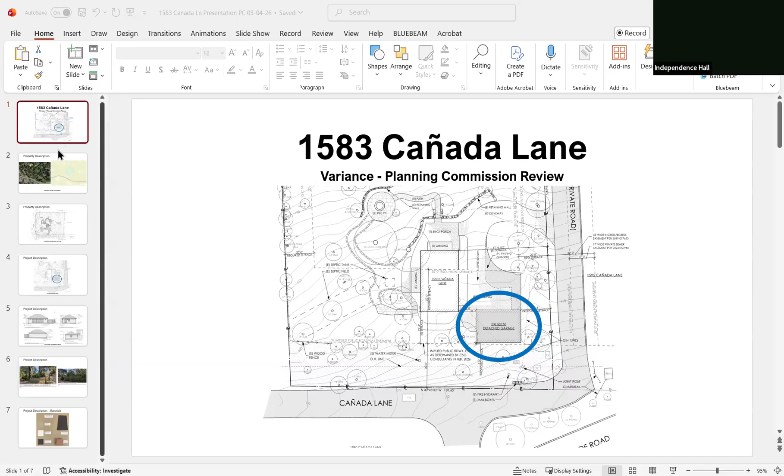To give a quick summary, the property size is 0.88 acres and is in the suburban residential, SR, zoning district, which has basic setbacks of 50 feet from the front property line, 25 feet from the rear, and 20 feet from the sides of the property line.

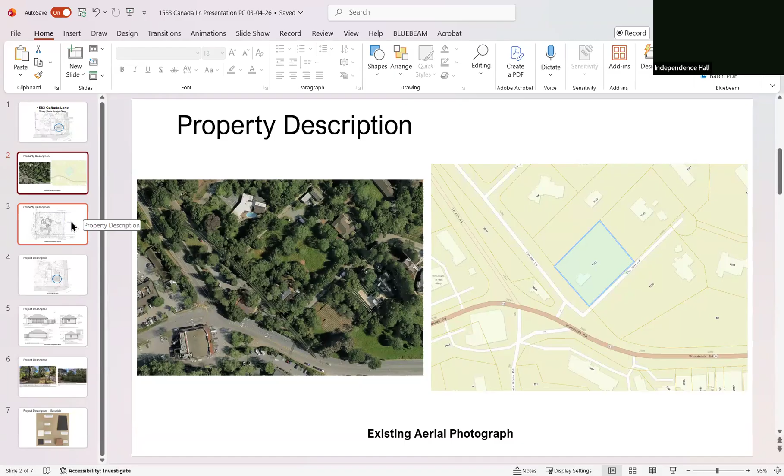The overall site is relatively flat on the southwestern portion, inclining through the center and northeastern portions. The elevation ranges from 148 feet on the southern side to approximately 185 feet on the northern side.

The site contains an existing one-story single-family residence and existing hardscape that are located on the relatively flat southwestern portion of the site. As mentioned in the staff report, the project site includes an easement for a public right-of-way at the southern side.

This determination was made by the town's engineering department, and it is important for determining lot size for allowable thresholds for floor area and paved area, as well as determining the setbacks from the front.

As mentioned, the applicant is requesting approval of a variance to locate the detached garage within the front setback. As explained earlier, the 30-foot half width of Cañada Lane projects into the front side of the project site.

Therefore, the proposed location of the garage would be 1 foot away from the interior boundary of this right-of-way. The proposed location of the garage would require the removal of 3 trees in its vicinity.

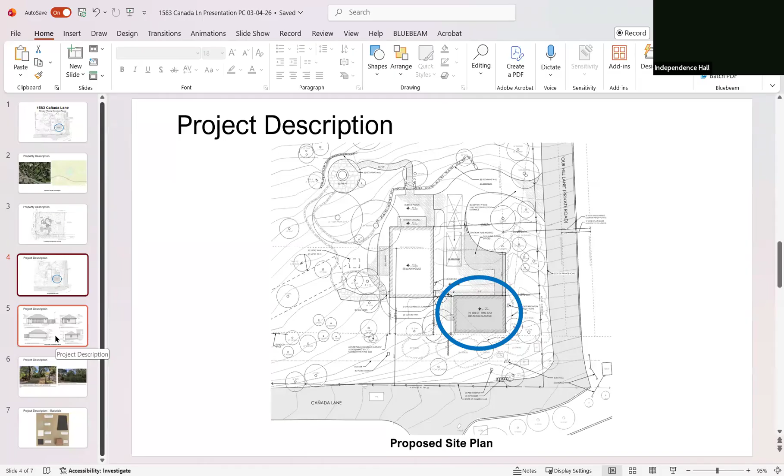The proposed garage would be designed in the same style as the existing main residence. As you can see on the physical materials board on your left-hand side, it shows the materials for the proposed garage.

This includes identical exterior materials such as brick, black asphalt roof finishes, and gray stained wood siding color. Here are the elevations for the proposed garage.

Here are the existing vantage points from the adjacent Cañada Lane and from the private road.

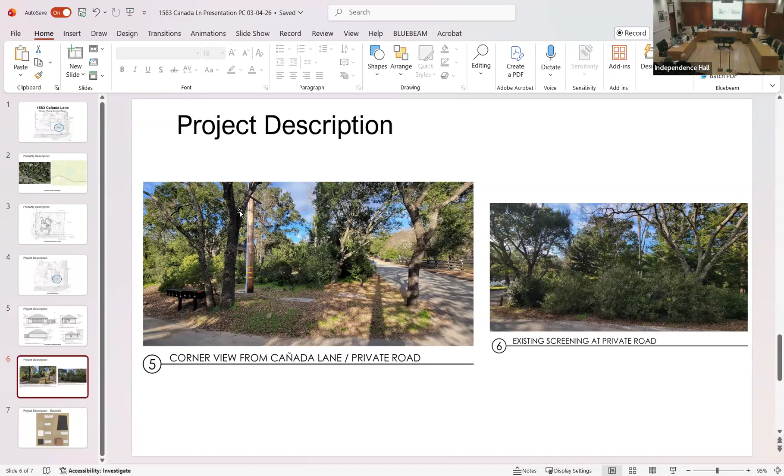Lastly, staff recommends that the Planning Commission adopt the draft resolution in Attachment 1, making the required findings to approve the variance. That concludes my presentation. Staff is happy to answer any questions.

Story poles were installed at least 10 days before the hearing date, and the applicant is also here in attendance to answer any questions. Thank you.

Do any members of the commission have questions for staff?

Yeah, I do. It seems like the nature of this whole thing is based on the 30-foot implied right-of-way from Cañada, from what I can tell. Historically there are records that kind of support it — we think it does exist, but the implied thing was a little bit weird. So my read is essentially we have a 30-foot setback from where the road is, and it's unlikely that would ever get built into the implied right-of-way. So that's kind of how I'm looking at it, but is that the right way to look at it?

How have other cases on this street been looked at in the past?

Our engineering department, along with outside consulting surveyors, reviews all the different documents. Based on what they reviewed, they determined that the easement is there. It wasn't something recorded on the property, but given all the different documentation they have, it is an easement for a road right-of-way.

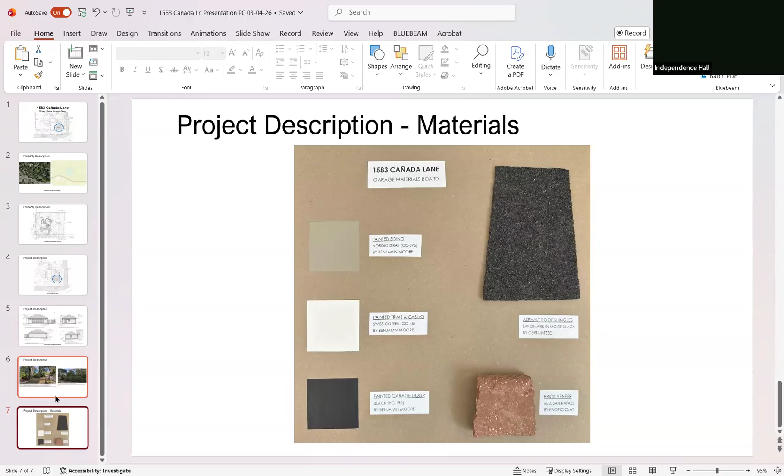You are correct, there are no plans to widen that road now, and there probably wouldn't be plans to widen it anytime in the near future. So for at least several years, unless something drastic changes out there with road widening and sidewalks, it would still have that buffer between the roadway and the proposed garage.

Just a follow up — have there been other projects in this section that we've come across before, and do we have a precedent? It's not completely uncommon.

You get into older lots, cut up pre-1950, and you get a lot of these things coming up from time to time, especially in the Western Hills — questions about right-of-way widths. I don't know if anyone was around when 215 Grandview was heard, but that was a major topic of that project. So it does come up from time to time.

Before there was a subdivision ordinance, lots were created in different fashions, often just by drawing up a deed and getting it recorded at the county, which was a legal way to create a lot back then. Sometimes it's a little bit difficult to find all of those details.

Am I correct that the official lot line actually goes over into the road, or the entry road?

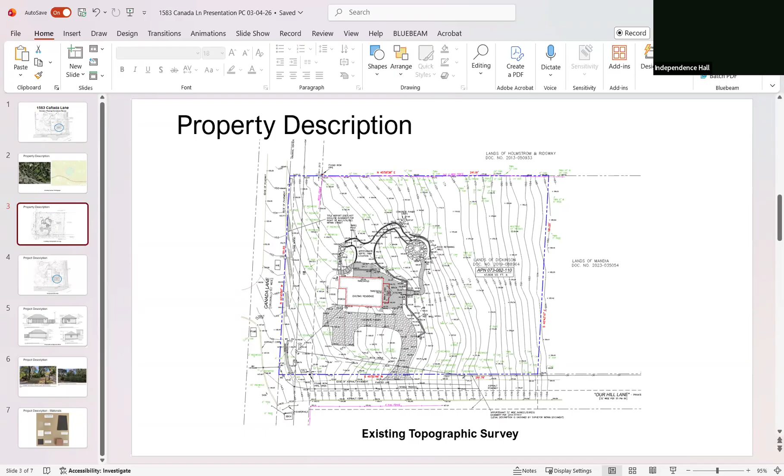Yeah, so what's being shown — if you pull up the site plan — is that you have a 60-foot right of way, usually 30 feet on one side and 30 feet on the other. If you zoom in, the property line that is the outer boundary of the 30-foot easement is just right about where the pavement is.

Okay, so the blue line is the property line? Right, so it leads right into the pavement of the road, just right around here.

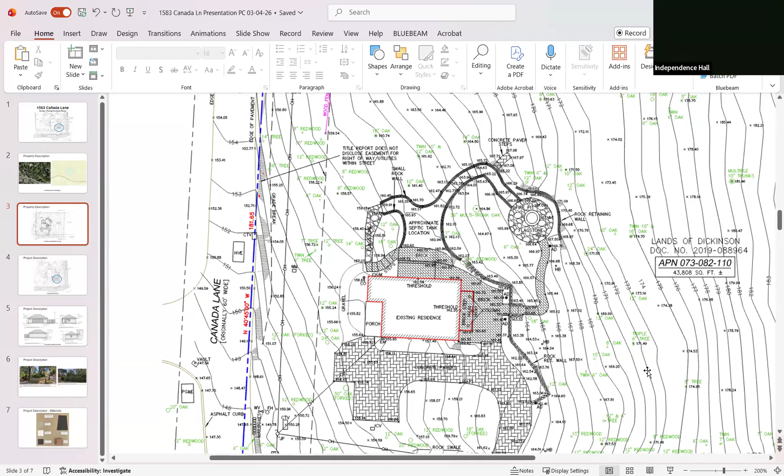And you can see these hatched areas — these are identifying little pockets of 35% slopes. So the road pavement kind of goes right up to where that slope starts to go uphill. Down at the corner where the garage is supposed to be, that corner trips over the road.

Is that correct? Right here in the corner. Yes. So again, it's a roadway easement, so that is something that could exist in that location.

Any other commissioner questions for staff?

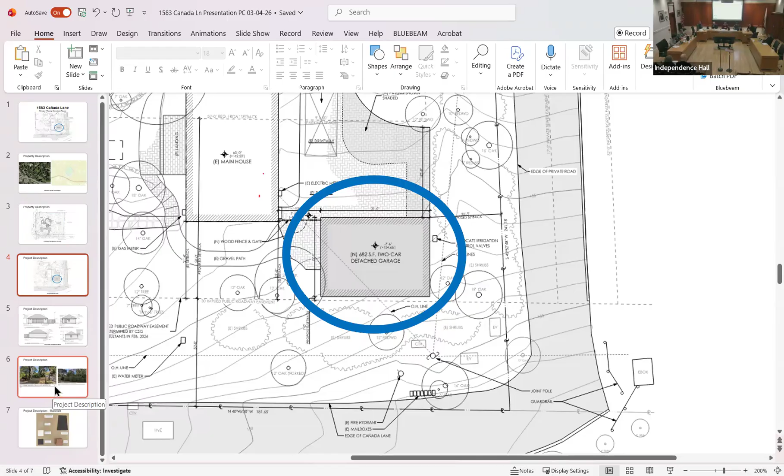Go for it. So, for Sage — excuse me — can you bring up that picture to the right of the driveway? Not this part of the lot, but behind the drawing here, behind where it shows. Yeah, that way. Okay.

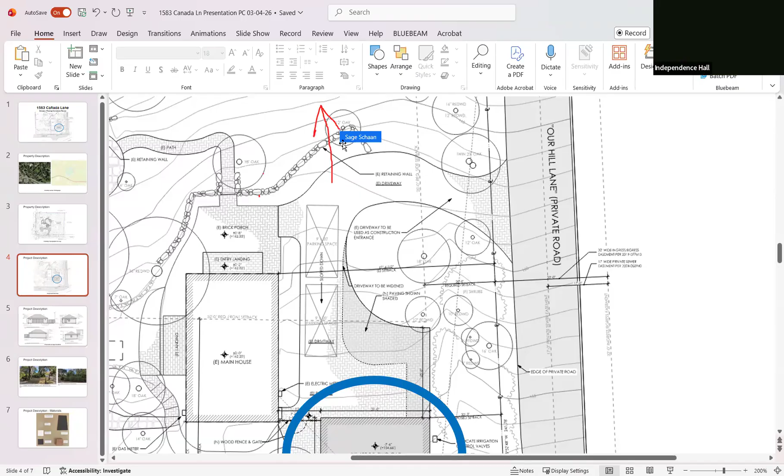So I'm wondering what is that? It looks like a wall. Is that a retaining wall? Yeah, in the back it's a short kind of rock retaining wall. So right where the existing driveway is, you notice it really slopes upward. The applicants are also contemplating an ADU in the future, which would probably be placed in that portion of the lot. So from this particular portion, yes, this is a kind of short rock wall.

The reason I'm asking, you sort of answered my question. So perhaps there are plans for the ADU in the future right at that spot. When I visited the site, I had a question: why wasn't the garage put on the right side instead of sticking into the setback? The applicant can probably help answer that too, but yes, it's partially that they have future plans, as well as the slope going upward at that portion of the site. So they chose to keep an area where they typically park their cars today.

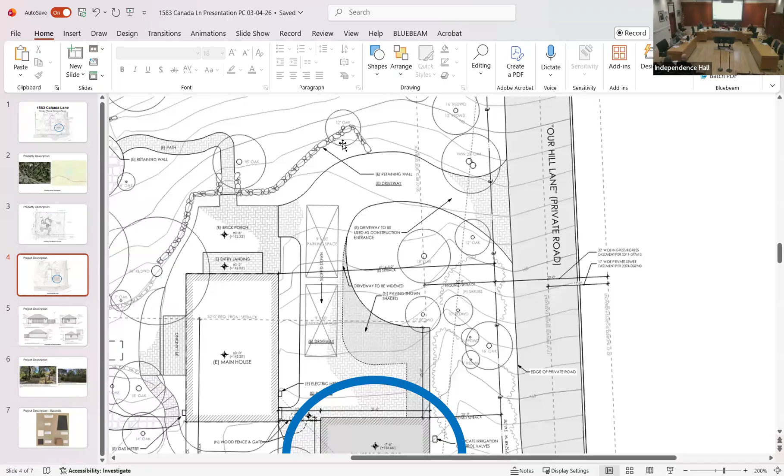All right, those are my questions. Alex, did you have questions?

Well, Richard's question prompted a question from me. I believe there was mention in the staff report that the goal, once the garage is done, is to have 4 spaces of off-street parking. Will that meet the requirements for what's built on the property now, or will the construction of a future ADU require that more parking be created?

It depends on the design of the ADU. If it's a studio apartment, it would not require a parking space. If it's a 1-bedroom or more, it requires 1 parking space, and that simply has to be something that's in the driveway area.

Yeah, I've seen the driveway. It's fairly wide and could probably accommodate a lot more than a few cars to park there, even for the ADU. That's correct.

Given an absence of further questions for staff, the applicant or the applicant's representative is invited but not required to come and speak and let us know your thoughts and what you're asking for. So feel free to come up to the mic if you wish. You're not required.